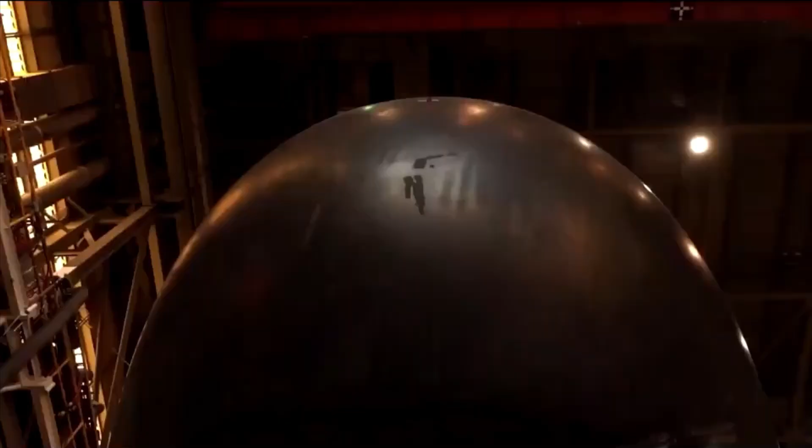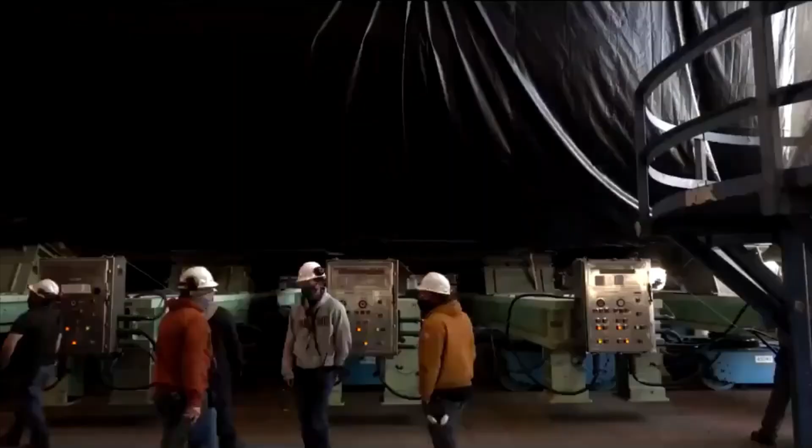Project 75I has been another interesting case of defense procurement undergoing a lot of challenges. Few months back, it was reported that the Defense Ministry has given its approval for amendment of the Project 75I tender released last year, which would allow the project to move forward.

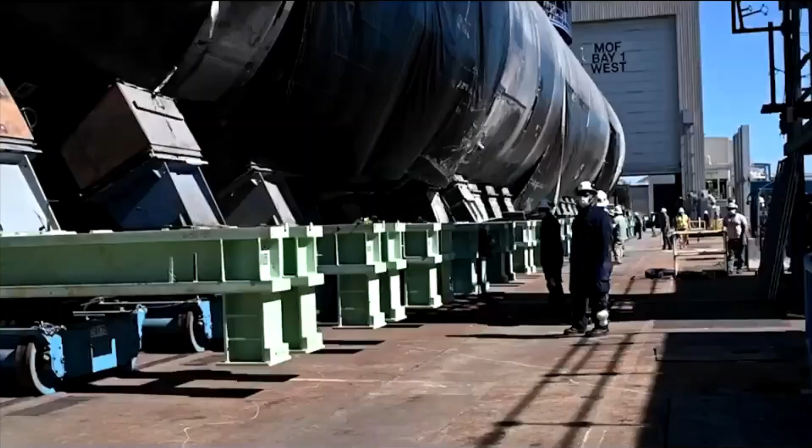The request was made to the Defense Ministry for removal of the 'joint and several liability' clause from the tender, according to which the foreign partner would only be responsible and liable for their work share in the project.

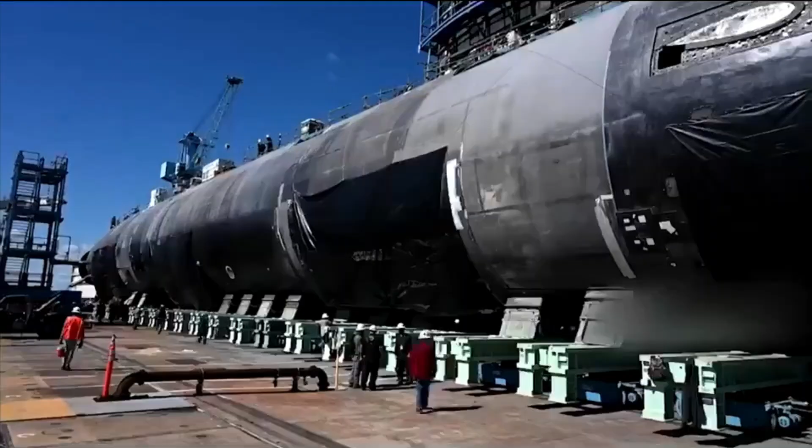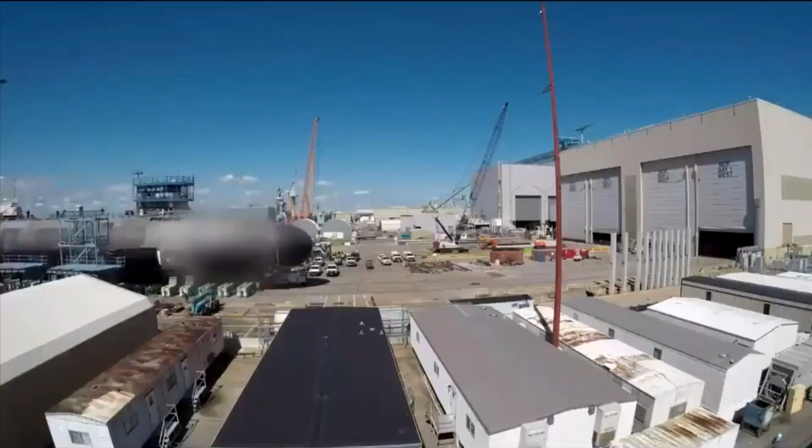Indian Navy is in discussion with 3 foreign OEMs, which includes Germany, South Korea and Spain, while France and Russia have pulled themselves out of this competition. Interestingly, Germany, which initially exited this tender, now seems to be participating in it.

Another reason cited by foreign OEMs which makes the tender challenging is the percentage of indigenous content. As per reports, the Ministry of Defense has demanded 45% indigenization in the first submarine and 60% overall across all 6 boats in the order. This ask of impossibly high indigenization seems unreasonable to foreign OEMs.

Mazagon Dock Limited and L&T have experience as well as an ecosystem of constructing submarines. India is also constructing advanced nuclear powered submarines. So the parts or components required for Project 75I can be supplied by indigenous companies.

At present, there are 2 major contenders for Project 75I, which includes Germany and South Korea. South Korea, which was seen as a major contender for this project, seems to have problems too.

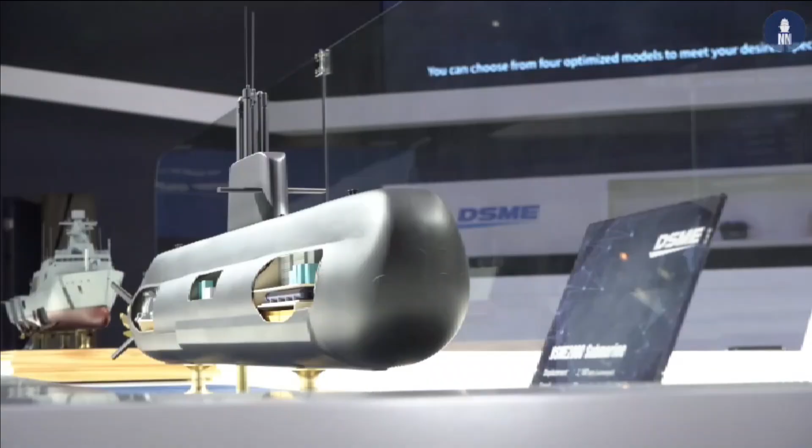As per reports, the Korean bank will not allow this bid as they see a lot of financial risk as per the RFP. Further, the South Korean firm DSME has not yet got approval for sale of submarines to India from its government. This brings Germany ahead in the competition, but it would result in a single vendor situation.

Now, in order to avoid this single vendor situation, MOD has asked HDW of Germany to make 2 separate bids, one for MDL and another one for L&T.

Interestingly, the collaboration with HDW is not something new for MDL. Indian Navy currently operates 4 Shishumar class, or Type 209 class, submarines. The first 2 vessels were built by HDW in Germany, while the remaining 2 were assembled by MDL under a transfer of technology agreement, but with very little indigenous content.

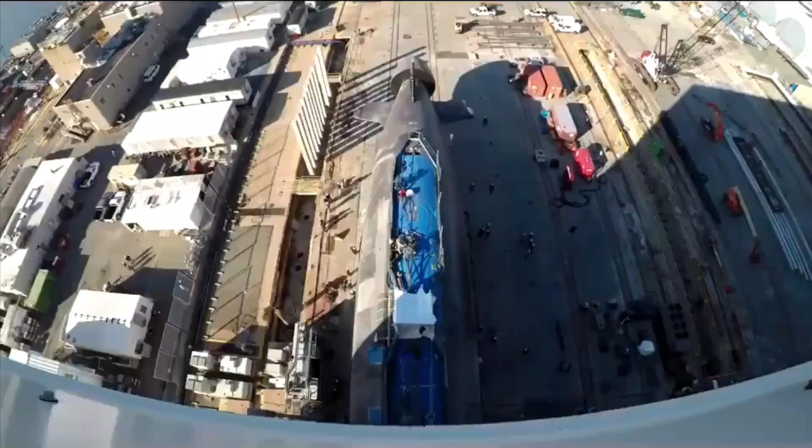It is also worth noting that a multidisciplinary design team was trained for almost 2 years in Germany to acquire knowledge of HDW submarine design, with access to relevant software, design data, empirical formulas, and linked values of design coefficients, and were considered capable of designing a conventional submarine. This team now forms the backbone of the Submarine Design Group, a premier organization of the Indian Navy. But the irony is that India still cannot design an indigenous submarine.

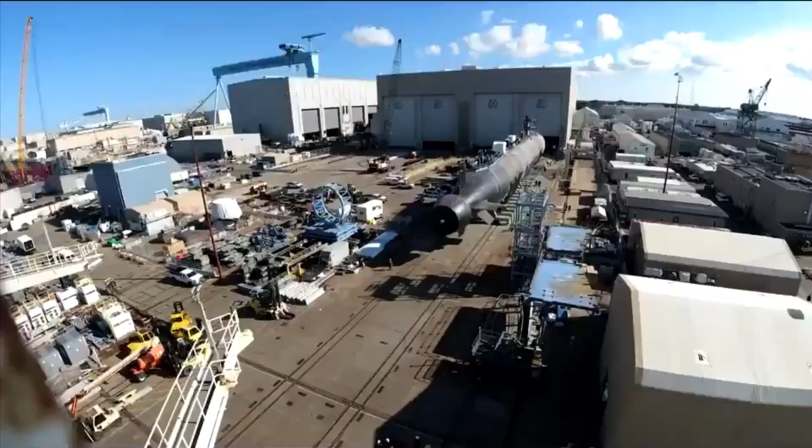However, you would be surprised to know that South Korean firm DSME, which is a contender for Project 75I, has designed its submarine based on the transfer of technology of the Type 209 submarine from Germany. Of course, we cannot expect the same design, and DSME would have refined it a lot further. But the point is, they have designed their own submarine.

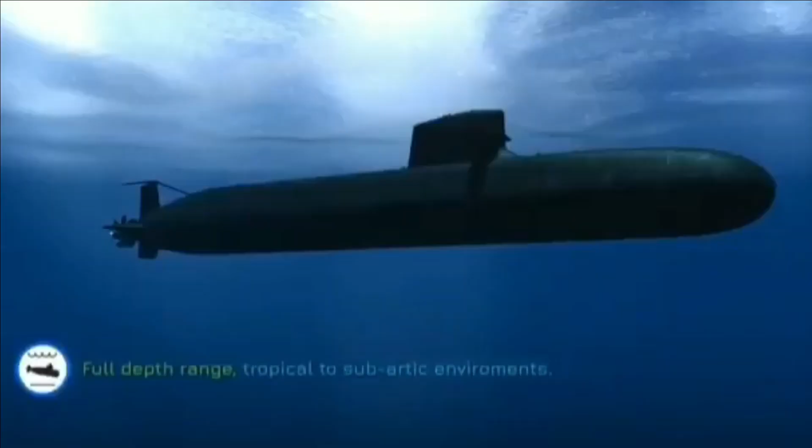One more reason for Germany being a strong contender for Project 75I is their fuel cell-based AIP propulsion. The AIP system developed and deployed by HDW has no moving parts, which makes detection of such a submarine virtually impossible.

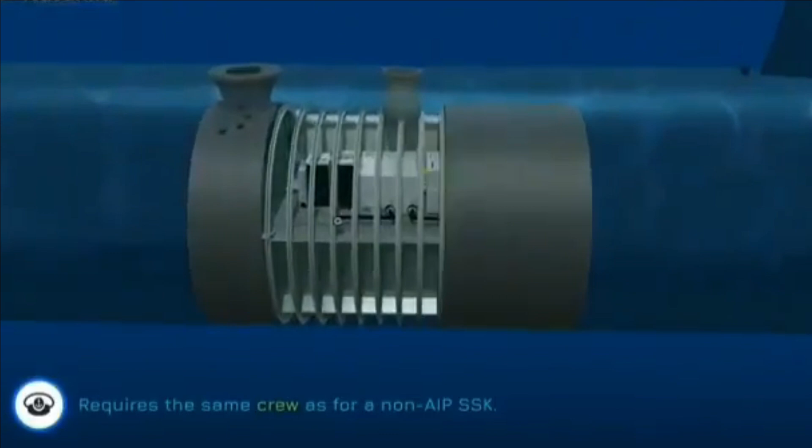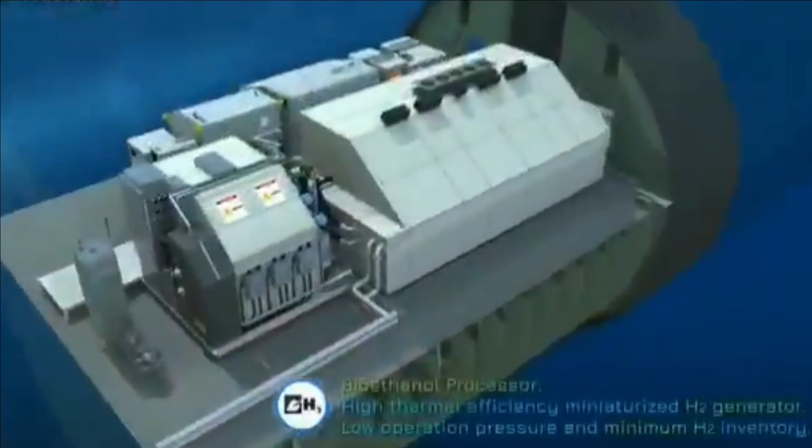The HDW class 212, HDW class 214, and HDW class Dolphin AIP submarines are powered by HDW's fuel cell plant. The operational fuel cell based AIP is one of the main criteria for the Indian Navy, where HDW fits pretty well.

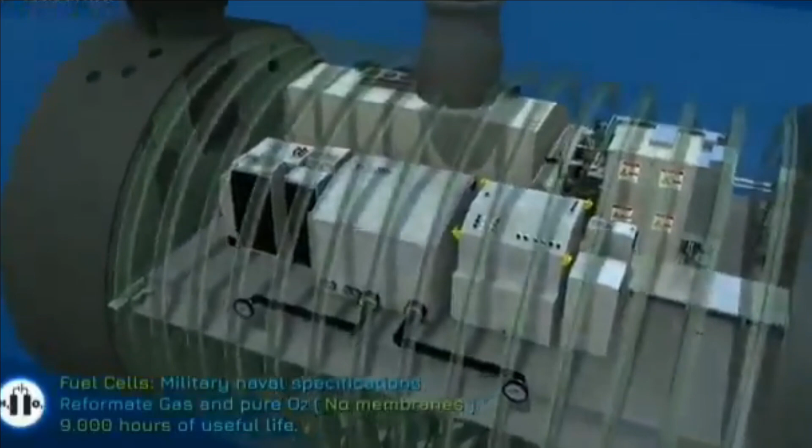Pakistan also tried to acquire HDW submarines in the past and were interested in Type 214 in the mid 2000s. The deal was very close to being reached but fell through when Pakistan opted for a more affordable and cheaper submarine which does not have a proper engine to power it, as the German firm MTU has refused to supply MTU 396 diesel engines to China. Citing the same reason, Thailand has also rejected the deal to procure Chinese submarines.